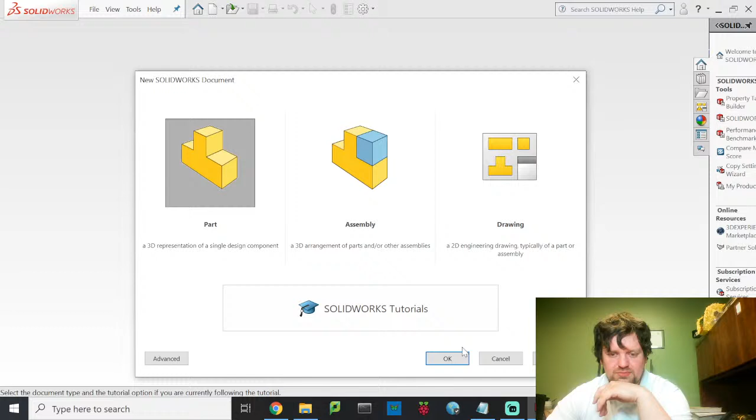I'm going to start by making a new part. Now, when I say reservoir, I do mean dust bin. I call it a reservoir because sometimes it's filled with water, sometimes it's just air. You can also have a foam reservoir, or a kind of goopy type reservoir that forces air through it—an interesting concept modeled after the human mucus system and how it collects and traps dust to prevent damage to your body, which is also kind of gross, but whatever.

Anatomy is gross, but that's coming from a biomedical engineer. I'm gonna just design mine to be very, very akin to a regular vacuum cleaner.

Now the types of dust bins I'm most used to are these shark dust bins, where the input comes in, the air cycles around, and as it cycles it throws the dust out of this portion and into the rest of the body. What you end up with is larger debris caught up here, but most of the actual debris you want to throw away is down here, and the outlet to the vacuum is right here. So in this reservoir you have to study where the input is, where the air comes in, and then it goes out through this central chamber. Because of the offset, it creates a kind of cyclone that propels all your items down into the base.

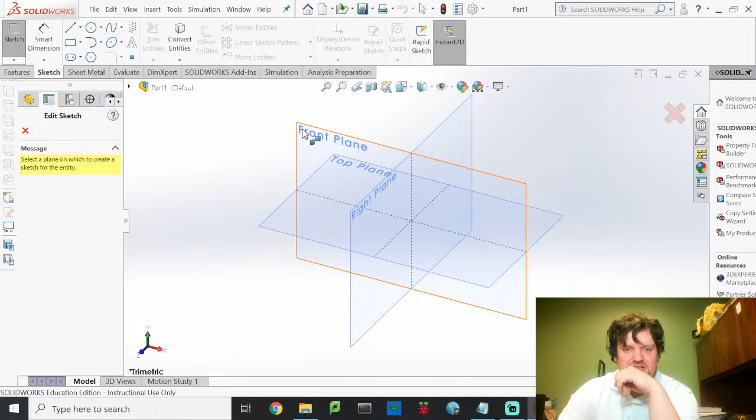Okay, that's nice. So I'm gonna go ahead and design my reservoir a lot like that. So here I'm gonna do a sketch. I'm gonna close this window real quick. I'm gonna do a sketch here on the top plane again because I am a normie.

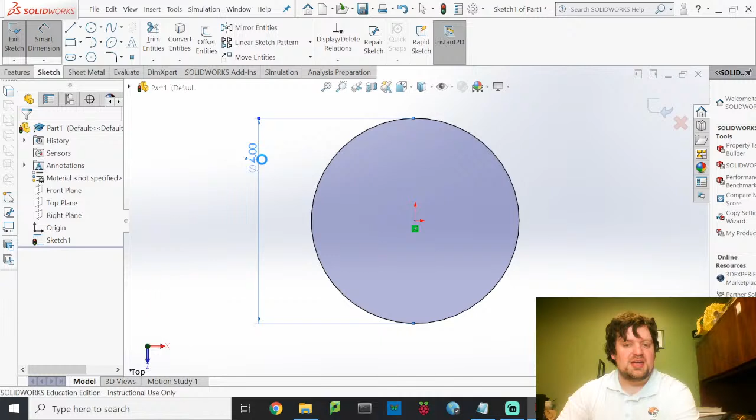Here I want a circle, because this is just going to be the foundation of my design. And then I put it on the origin, smart dimension it, dimension the outside of this circle. I want it to be about 4 inches in diameter. I don't want it to be too massively huge. The irony is that my fan itself is bigger than this unit. I'm gonna have some incredible suction powers. You know what, I better make this a hand vacuum. There we go, hand vacuum. Exit sketch.

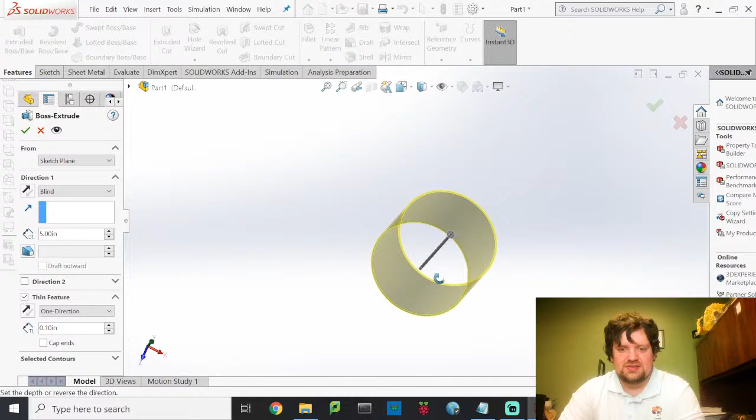Now when I go to extrude this, I can do an extruded boss base. There's two ways I can do this. First, if I just want this to be a mean diameter of 4, but I want that to be a thin shelled plastic piece, I can do a thin feature and then extrude this up maybe 5 inches. So now I have a thin feature, just a tube. That's what the thin feature does. And I can change the thickness of the walls by going down here and clicking on 0.1 inch. That's one way of doing it.

The other way is I can go in and do a shell, which cuts out everything but one surface, turning it more into a cup shape. Here I am actually going to make this a thin feature, because I want to put that cap on the bottom so the dust can be emptied from the bottom. And we'll go with that. So yes, I am totally about to rip off Dyson here, and no, I don't feel bad.

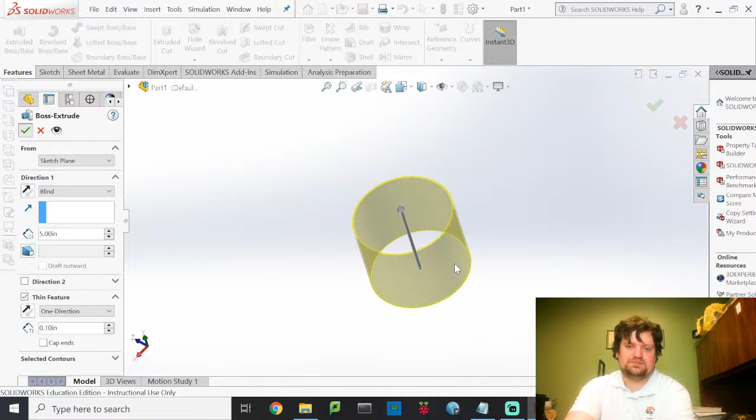So I'll go ahead and hit yes. And there I go, I have my reservoir. Now I'm going to have to make this an assembly piece, but I'll worry about that a little bit later. The next piece of this is I have to establish my inputs and outputs.

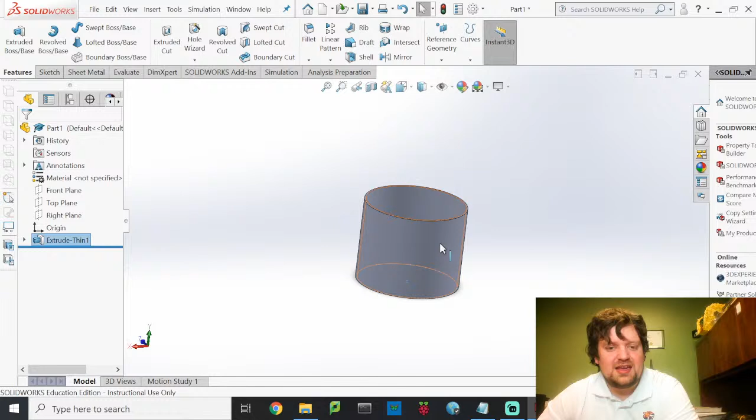Here I'd like my input to come in from the side, like what we were seeing with those other vacuums, and I want it to be offset a little bit. So I'm going to do a second sketch on the front plane. Front plane is right there. I'll go ahead and orient my view so that it's looking at the front plane.

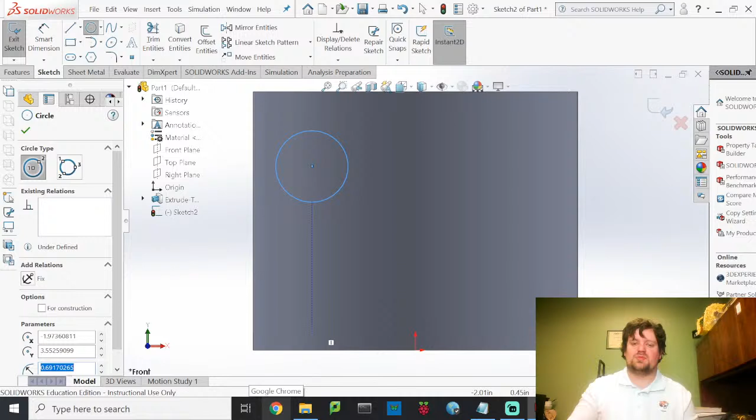And then I'm going to draw a circle like this. This is going to be my input tube circle. It'll come in and be tubular. Now, according to this design, I'm going to try to design it so that it's integral to the piece. I don't actually want this piece to be removed. So my inlet's going to be in one place and my outlet's going to be in another place. Hopefully I'm not going to be dealing with a very challenging component, but we'll see how that works out.

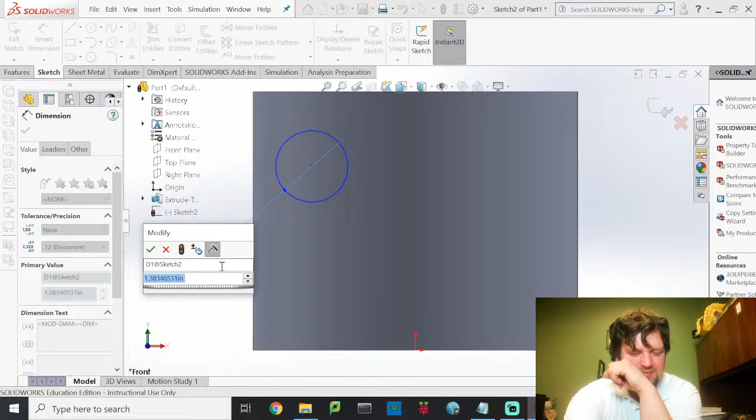I want this to be offset again because it's going to cause this thing to circulate inside of this tube. So the first thing I'm going to do is identify the circle. I'm going to use tube diameters of about 1 inch - it makes everything a little more compact. I guess I could use 2 inches, about this big. Inch and a half maybe. We'll do 1.5 inches - all of my tubes I'll try to make 1.5 inches.

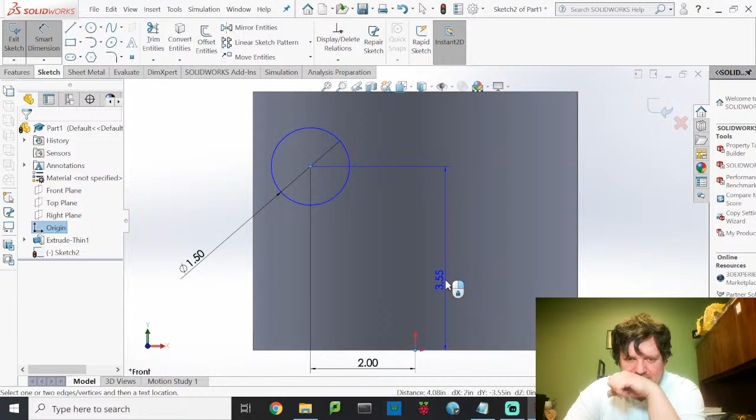Okay, so I've established that. Now I want it to be offset from this center point by 2 inches, and I want it to be offset vertically by 3.5 inches - just because that's really close to where I currently have it positioned. That's nice, so you'll notice it's fully defined. Go ahead and exit sketch.

Now I drew this on the front plane. If you go in and look at it, it's right there. I'm going to be cutting a hole in this side of the reservoir so that I can route a tube there.

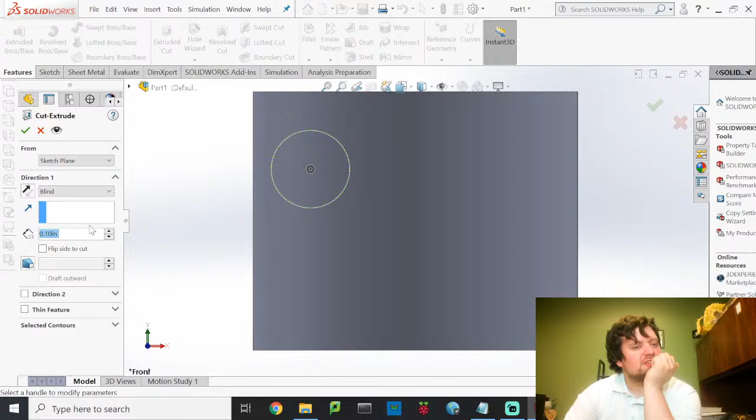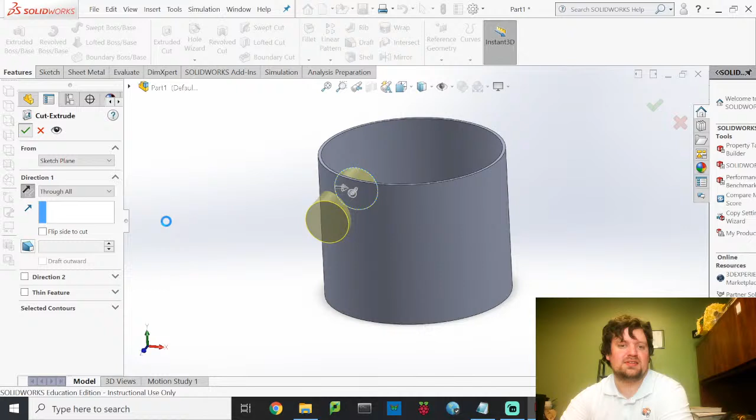So we'll go back into features and then do extruded cut. And with this extruded cut I'm going to make it go through all. Now if I hit through all both, it'll go through both sides - I don't want to do that. Here it's trying to cut through that side, I don't really want it to cut through that side. I want a flip side. Nope, nope. I want to have it cut this way. So I'll hit yes, and it'll cut a hole right there just like that.

Okay, well that's nice, it's a pretty looking hole. But I want a tube that goes to it. So I'm actually going to have to step back and do an interesting fix. Bear with me here.

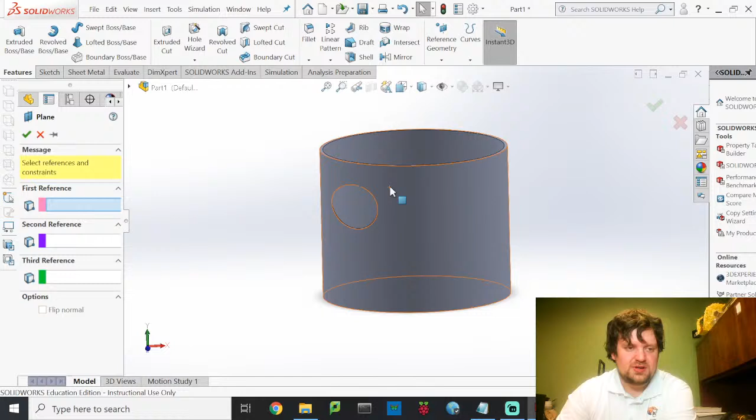I'm going to create a plane - we'll hope that my computer can catch up to what I'm trying to do. I'm going to make this be an offset from the front plane. I want it to be offset by - let's see, this is a 3 inch radius, so this will be 3 inches from the front plane to here. I want it to go out another 1.5 inches, so 4.5 inches from there. And that's where I'm going to draw my tube.

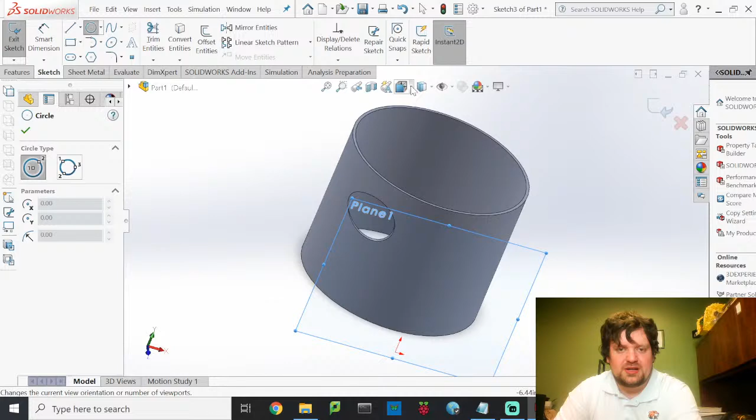Okay, so follow with me, follow with me. I'm going to sketch, and I want to sketch on this plane 1. Since I had plane 1 selected, it automatically decided that I wanted to draw on it. Nice work. I'm going to orient my view so I'm looking at where I'm at, and then what I will do is draw a circle.

Here I want this to be again - I said I wanted my tubing to all be 1.5 inch diameter. I actually want that to be 1.5 inch outer diameter, so I'll hit 1.5 inch. And then I will establish this vertical distance as 3.5 inches, as I've already done.

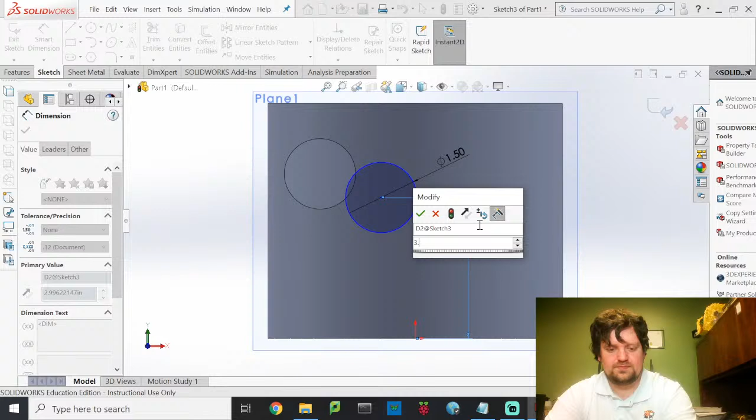I probably could have just copied this drawing instead of recreating it twice, but whatever, I don't care that much.

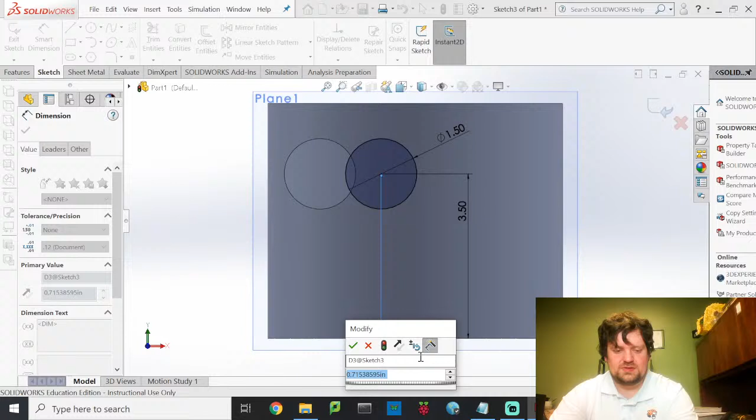Let's see, I think I had this at like 1.5. No, is that 2? Yep, there it goes. Okay, I'm going to hit OK, and then exit sketch.

Now that was fully defined, and I have this piece here, this circle right here. What I can do is go in and do an extruded boss base, selecting my circle.

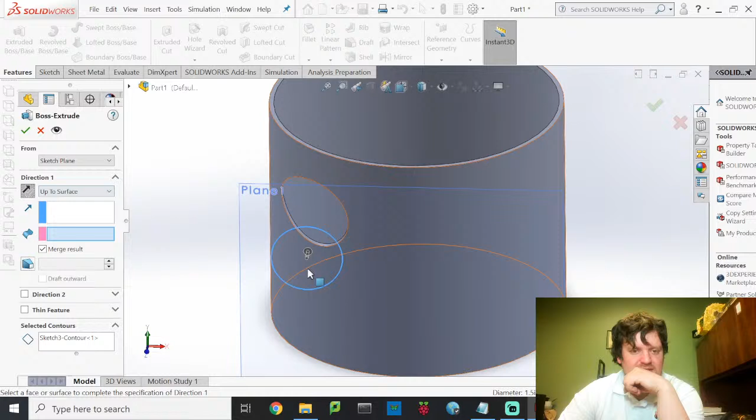I want to extrude it to this reservoir, so instead of doing a blind, it's going to go up to surface. I'll switch the directions, then pick the surface I want it to go up to, which is this one. You'll notice it just goes all the way through, so I'm going to make this a thin feature, and that will fix it because they are the same size.

Now all I have to do is hit OK. It did say to merge features, so this is now considered all part of one part. So there we go, we have an inlet valve.

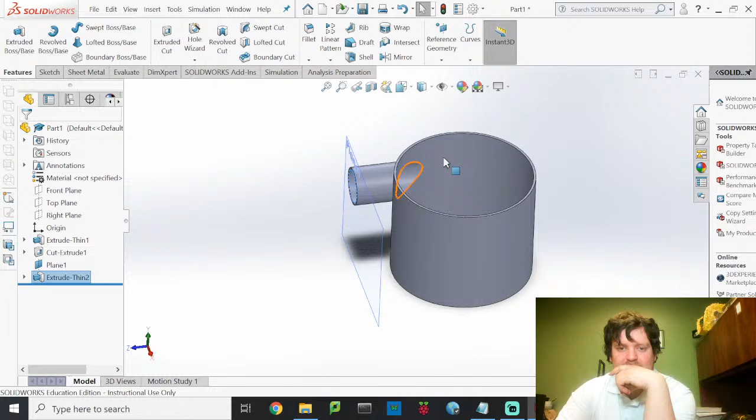I'm going to have air come in here, it's going to kind of spiral around, and then I'm going to have an output port where basically the air is going to spin around, and then go through a tube in the center. So I'm going to create my tube in the center as well as the top piece here, because those are kind of integral.

I'm going to make those two part of this piece. So here we're going to sketch, and I'm going to do it on the top plane, which is where I have that. Go back and click on the top plane again, so I can draw right here on this base. I'm going to orient my axes.

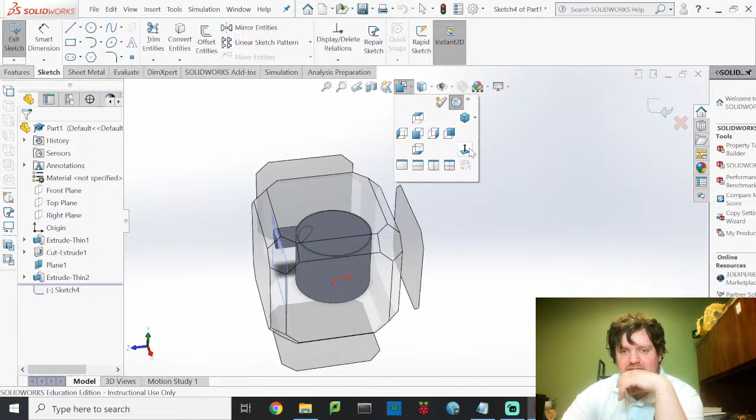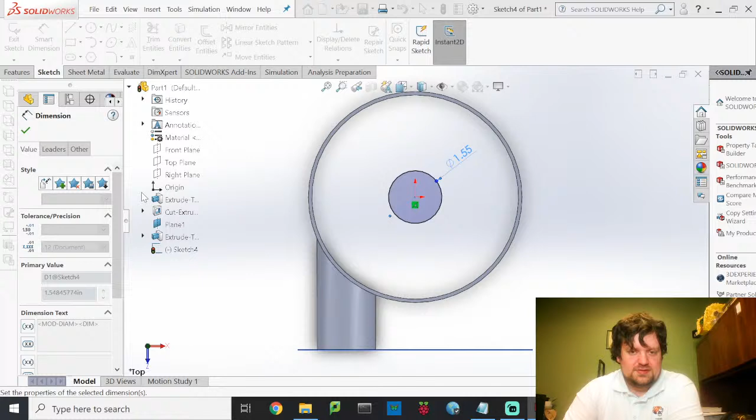Now I'm going to create a tube from this center point that just goes up. So I'll do a smart dimension. I'm having all of my tubing be 1.5 inches, just because I like consistency. And then I'll hit exit sketch.

So there's my circle, I'm going to extrude it up to the top here. Dang it, nope, I'm actually going to go back and delete that. I don't want it to be drawn right there.

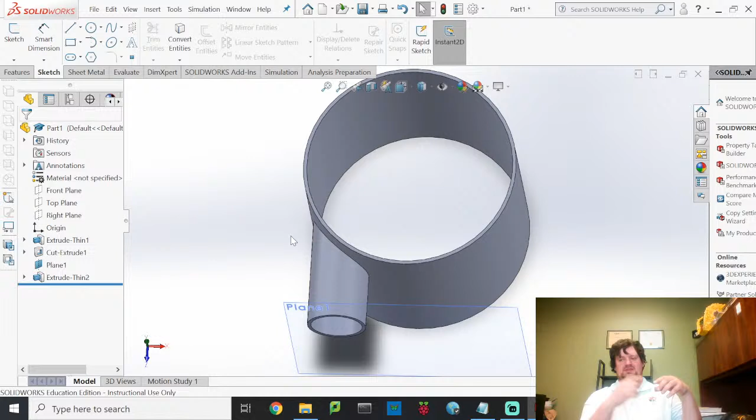I'm going to draw a top piece, and then extrude downward from that, just so I don't have to try to make some very funny geometry. Typically what they have for the tubes that drop down is they're perforated, they've got holes in them. I don't want to do that because I am not trying to design a vacuum well, I'm just trying to design a vacuum. So we'll try this again.

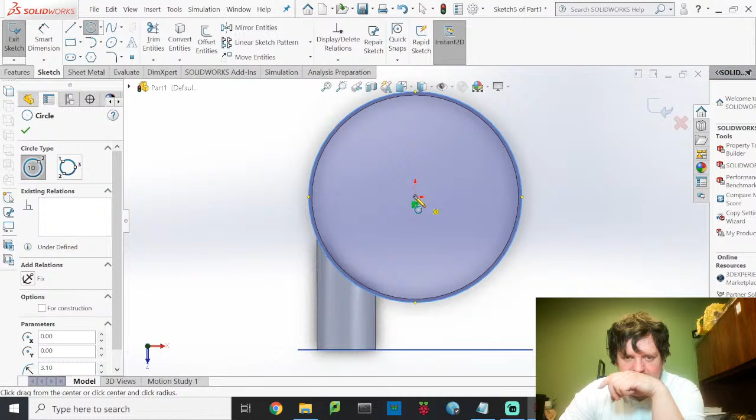I'm going to sketch, and I want to be drawing on this top surface right here, so I will quickly reorient my view. Then what I'm going to do is draw 2 circles, one from here to the outside there, and one from here just to there.

Now I'm going to dimension this one. This one I want to be 1.5 inches, as I've said, so the hole for it is going to be 1.5 inches. Now that's fully defined. Now this one out here is not, and that's because if I click on it and drag it, it's not really defined.

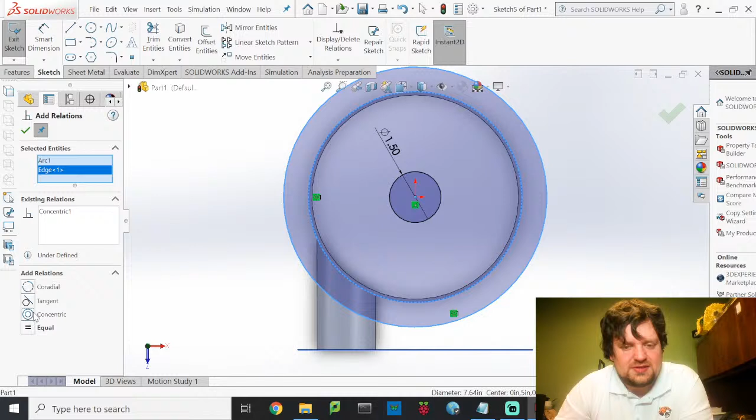So I need to add a relation. I've got this arc selected, I'm going to select this one, and I'm going to make them be— I think concentric, no that doesn't do it, never mind. I want them to be what co-radial is. Yeah, co-radial, or tangent, both of those actually work. Although in this instance, co-radial is just better because it means they have the same radius. Now, when I click off of this, those are both fully defined.

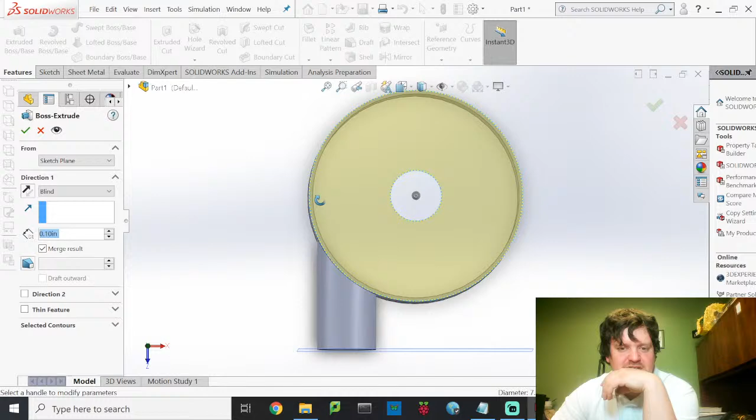I'll hit exit sketch. Then, because I want this to be a thin plastic feature, I'm just going to extrude it up 0.1 inches. I could've cut it on shell, probably would have been easier, but look, it's already at 0.1 inches. I'll make sure it's going in the right direction—it is. I want it to merge result because I want this all to be one part, which it is. And there we go, now my reservoir has an empty bottom and a hole in the top.

Okay, now I'm going to create a tube because I want the outlet to be down here closer to the base of this item, and it's just going to come out like that.

Again, not really designing this well. No, you know what? I'm just going to leave that as is.

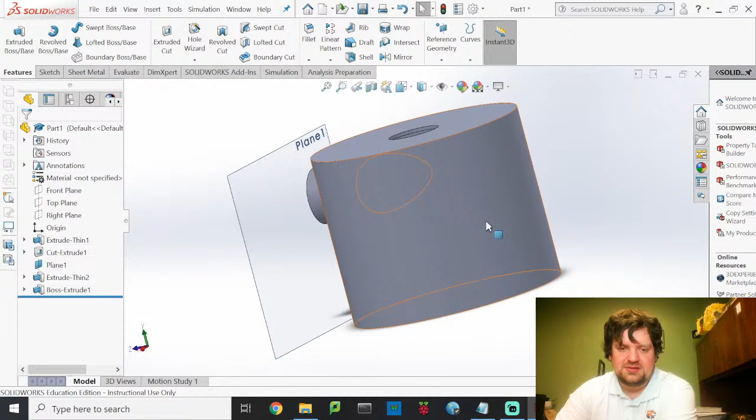I'm going to finish this piece by adding a hinge right here, basically just a hinge pin so that this can lock. And I am going to put a locking clasp right here, piece, so that it can clip on. Actually, no, that's way too designed. I'm just going to put a hinge, and then I'm going to create a plate for the bottom.

And then I'll build this into a reservoir assembly so that we can move it as one piece from there. But I do have to add those 2 circles in the back.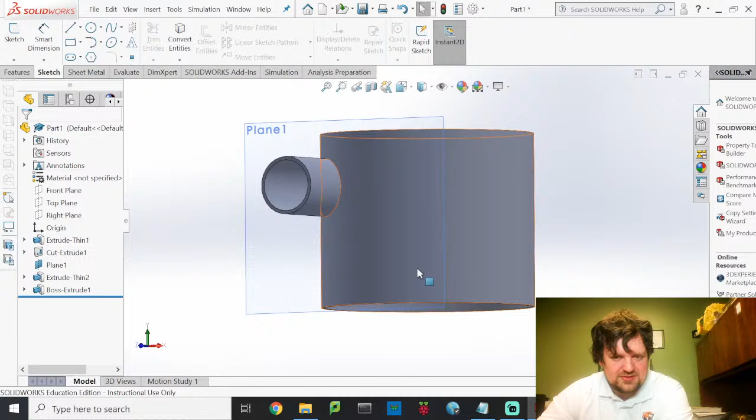So what I'm going to actually do here is I'm going to draw a sketch, and I want to do it on the right plane. This is one of the reasons why I wanted to have my origin right in the center, was so that I can draw on all of these planes and have some control over where these planes are. It's always good drawing practice to keep your origin in some kind of a convenient location. So here I'm drawing on this plane.

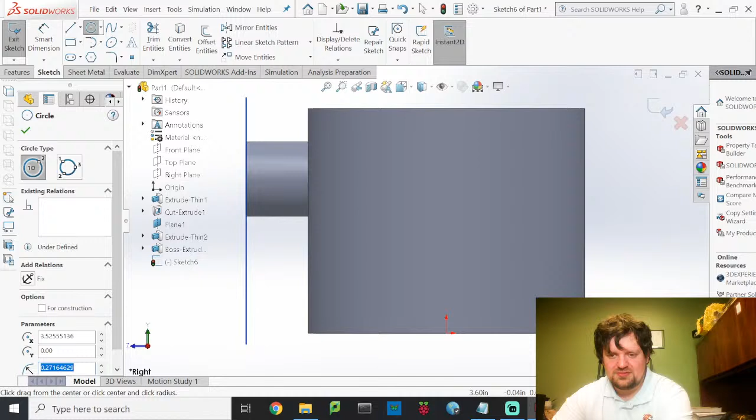I want my hinge to be about right here. Basically all I'm going to do to make a hinge is it's just going to be a circular piece like this that will have a hole in it, so that I can run a pin through there to connect a piece on the bottom.

So create 2 circles, hit escape. Now what I'm going to do here is I'm going to select this point, and then I'm going to select this origin here. I can hit control and hit both of them. Under existing relations, I want them to be horizontal. So it just means it'll hinge about this bottom piece here.

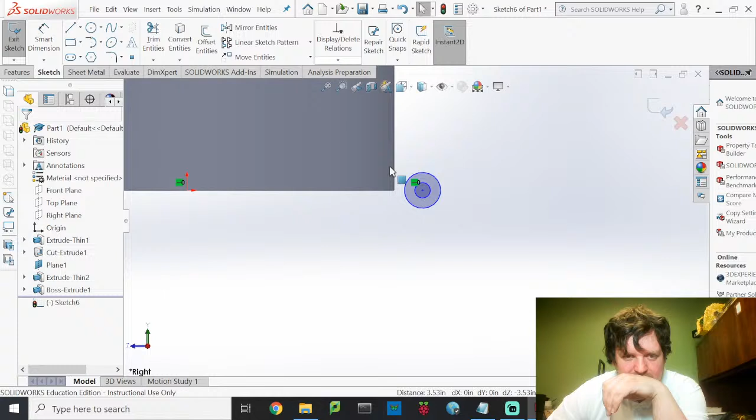Now I'm going to add another relation. Actually, I want this piece here to be tangent to this outer piece, so it's like a little circle piece goes on the outside. So I will add relation, pick this arc, pick this edge, make them tangent.

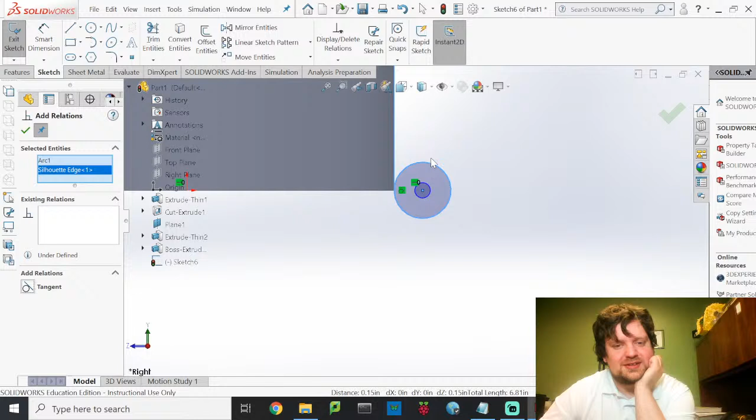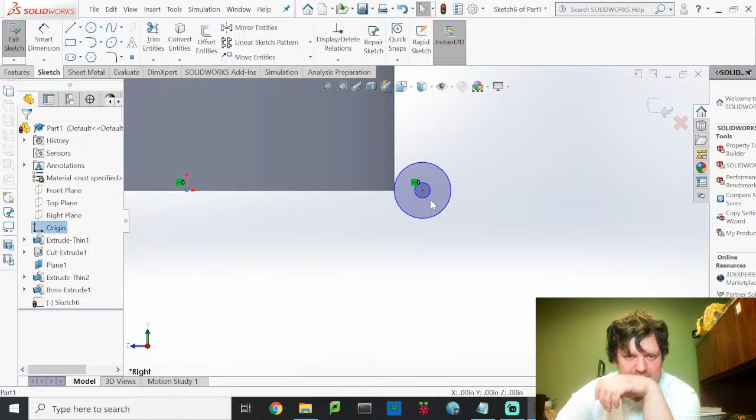Now, realistically speaking, this is only going to connect at one place, and it's not really going to be a very good connection. Tangent probably is not the best way to connect that. I am going to go ahead and just delete this. I'll set a smart dimension from here to the center point.

Smart dimension. Right now it looks like it's at 3.5 inches. I only want this to be about 3.25 inches.

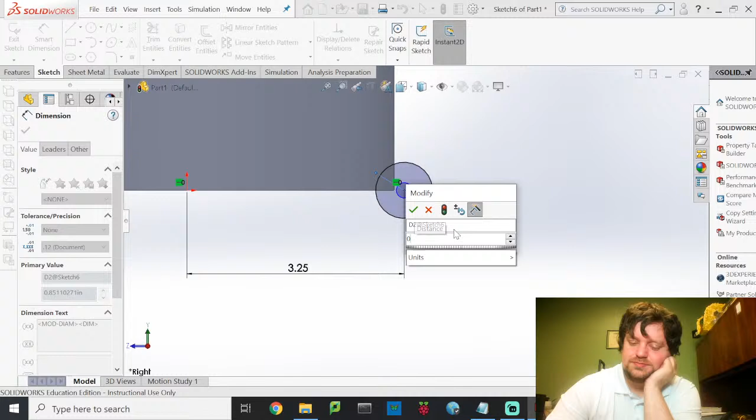And then I want this diameter of this circle to be, I don't know, quarter of an inch. That might be too small. Yeah, I'm going to change that. I'm going to pop this up to 1/2 inch.

It will intersect the base here, which again is fine. And then for this one, I want this to be 1/4 inch, because that's going to be my pin diameter that I use to connect this piece on. So I'm going to hit OK.

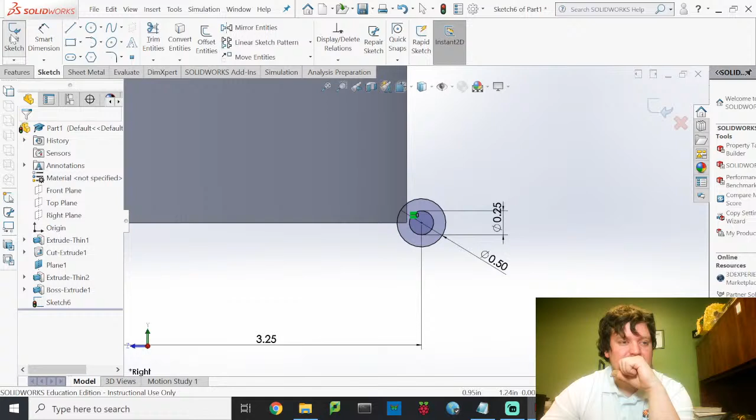It's fully defined. I exit sketch. And then I'm going to go back in and boss base extrude, because I just want this piece. You'll notice it already kind of intersects.

It does intersect with this piece there, which is fine. And then I want to go mid-plane extrusion. Basically, I want it to extrude out both sides. And I want this to be about 1/2 inch long.

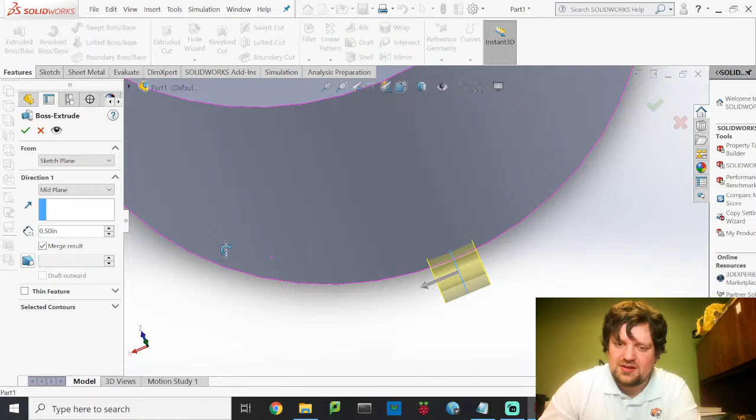Okay, so it will intersect with this. It doesn't appear that it stops intersecting with it, which is kind of what I want. It's got to have some place to connect to. So 1/2 inch. There we go. Oh, that looks pretty. I like that.

Alright, so I've got my hinge joint, I got my input, I got my outlet. I am going to have to put a filter up here, which I will do right after I finish building the rest of my base.

I am going extra on designing my base. You probably don't need to do anything like this, but oh well, it's time for me to show you good practice. So I'm going to go ahead and save this piece.

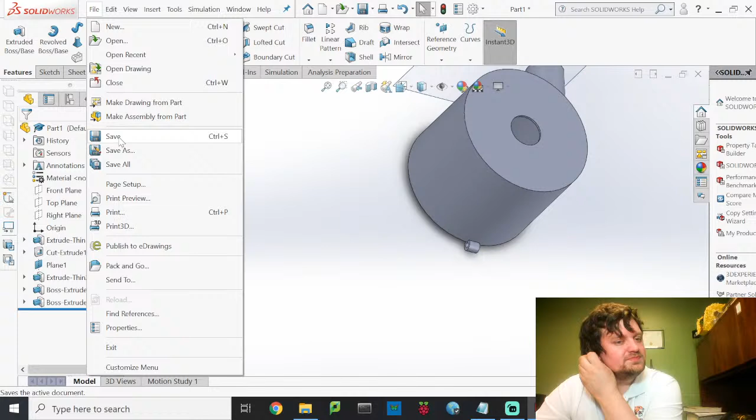Now, as I've told you, you should save all of your pieces in one place. Here, this is my vacuum cleaner. Start date of when I started drawing it, which was 4/1. I'm going to call this Reservoir Body. And hit enter. It'll save it.

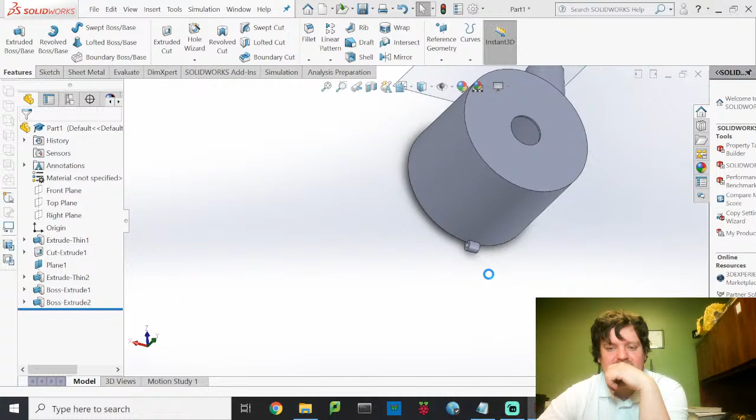And then I'm going to create 2 more drawings. One of them is going to be a really simple pin, which is just going to be, it's a plastic pin which will go into hold the reservoir flap on. I'm not going to design the clasp for that thing. This thing is just going to be a flat piece, because I can.

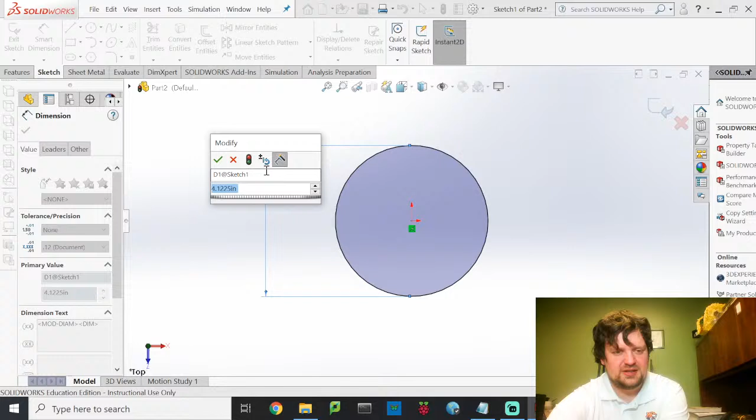So here, top plane, draw a circle, start dimension. This is going to be 6 inches in diameter. Then I exit sketch and extrude this 0.1 inch.

And hit yes. So here now I have my flap. Now I am going to create a method of joining, because I have to be able to fit in, slide on and then surround that, and then a pin has to go through all of that. So I've got a 1/2 inch gap right in the center, where that pin comes down so it'll connect into that joint.

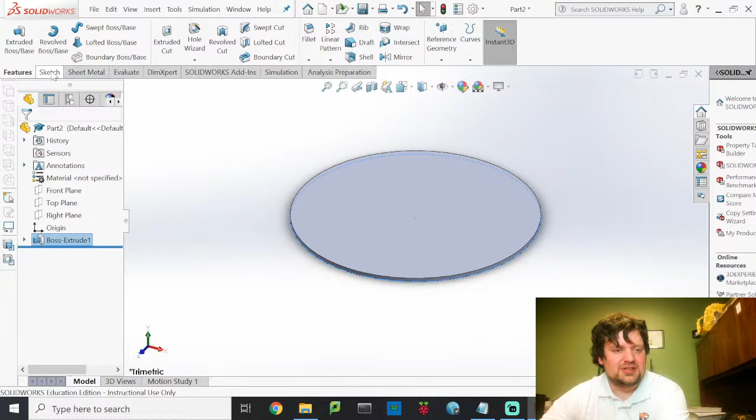So you know what, I'm going to do something fun. I'm going to do a revolved boss base here. I'm going to sketch on this top surface, zoom in normal to it, and then draw a rectangle. I'll draw it a little bit over here and then move it back closer.

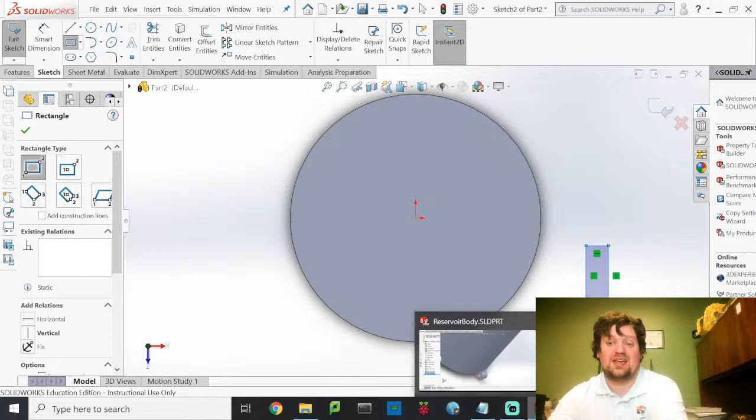What I made was this round piece. It's 1/2 inch diameter, 1/4 inch pin diameter, so that means I've got 1/4 inch of material between the two sides, making my wall thickness 1/8 of an inch. And for my dimensions, I'm just going to make it 1/2 inch on both sides too. So the dimension of this square needs to be 0.5.

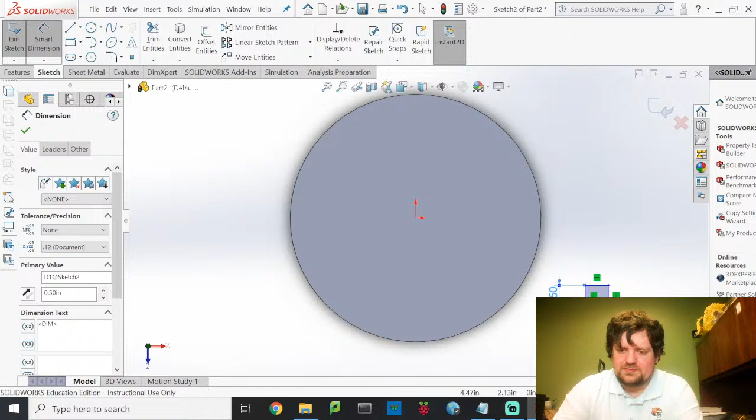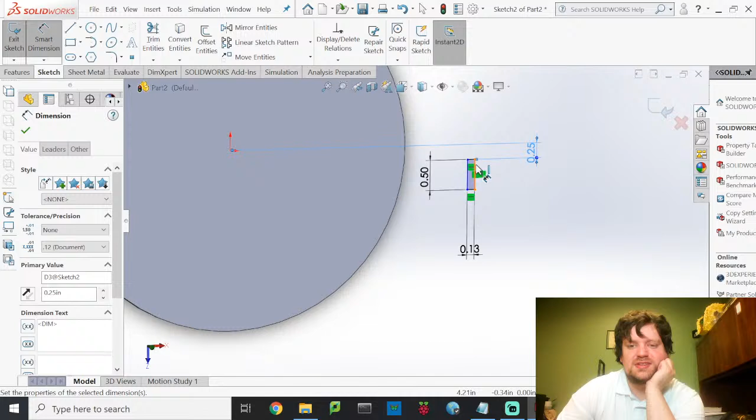By 0.125. Now this piece here, from the origin to this top piece is 1/4 of an inch. You'll notice the dimensions here all get kind of gross, but that's fine, in a sketch it doesn't matter. And the distance from this inner line right here to the origin - we had it be, what, 3.25 inches? No, it was 3.25 to the center, so this is 3.125.

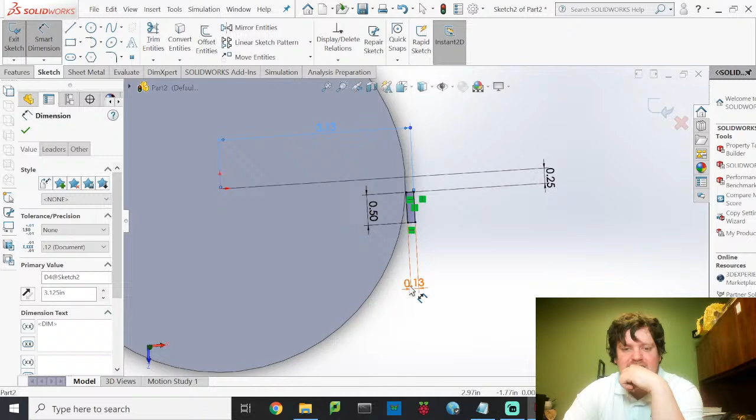Now, as you'll notice, this piece is not actually connected to our drawing, so I'm going to make this dimension, instead of 0.125, a little bit bigger - I'll make it 0.2, just so that it connects all the way. Now you'll notice it's fully defined. I'll hit exit sketch.

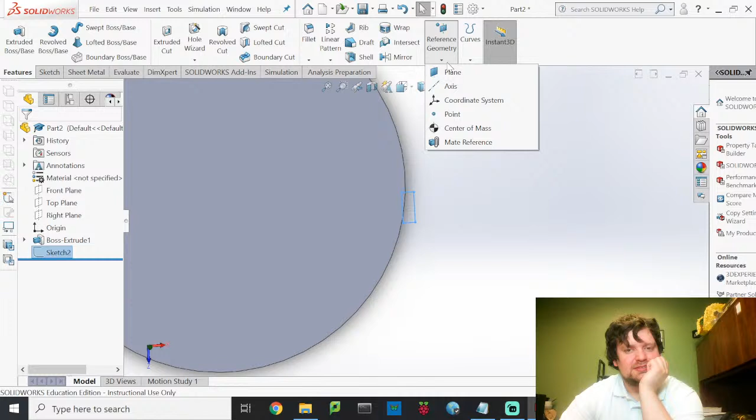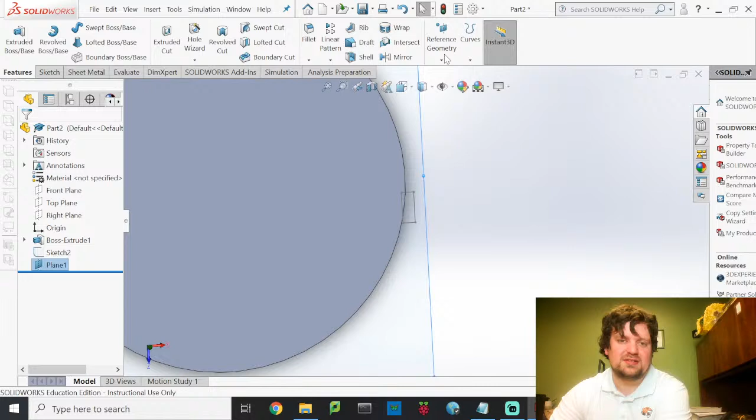I am going to very quickly create an axis that I want to revolve this around. To do that, I'm going to have to create 2 planes first. Alright, we'll play that game. So here, I want it to be coincident, it's now fully defined - there's plane 1. I'm going to create another plane here, and it's going to be - not the front plane, it's the right plane.

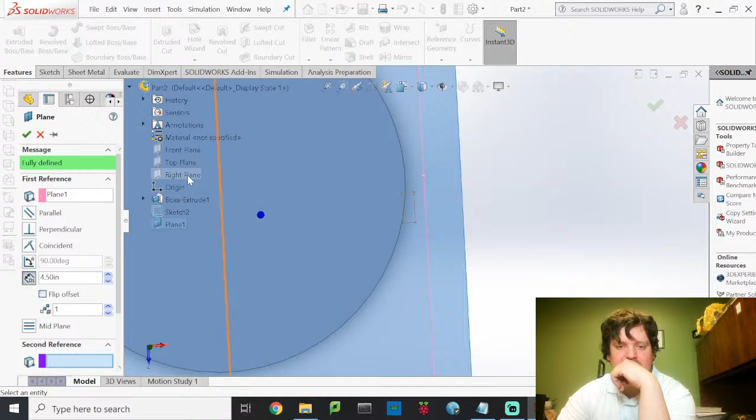Can I draw on the right plane? I totally drew on the right plane. Oh well, this component's going to have to be rotated - whatever, that's something we can deal with in the assembly. But I'm going to make this coincident to - oh no, coincident to the right plane. Oh no, I didn't want that to be coincident, I wanted it to be parallel. I'll just go in here and click plane 2 and edit feature.

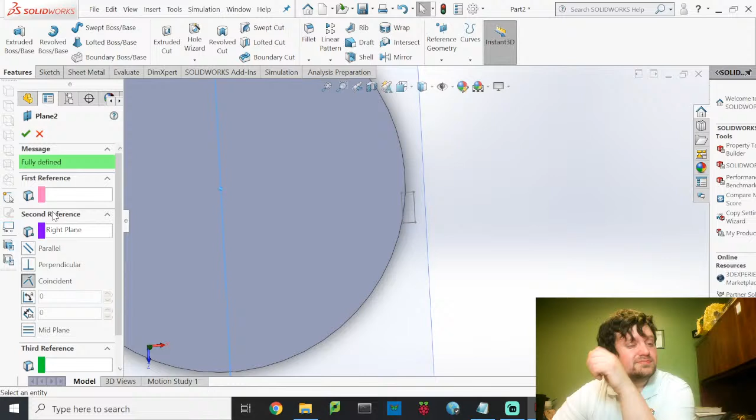We'll set it as a distance, and have this be 3.25 because that's the distance to where I want my axis to be. Okay, this will allow me to establish an axis. So here I can create an axis at the intersection of those 2 planes. So I click 2 planes, then plane 1, then plane 2 - or face 1, I guess, works just as well when I don't need a plane 1. And there we go.

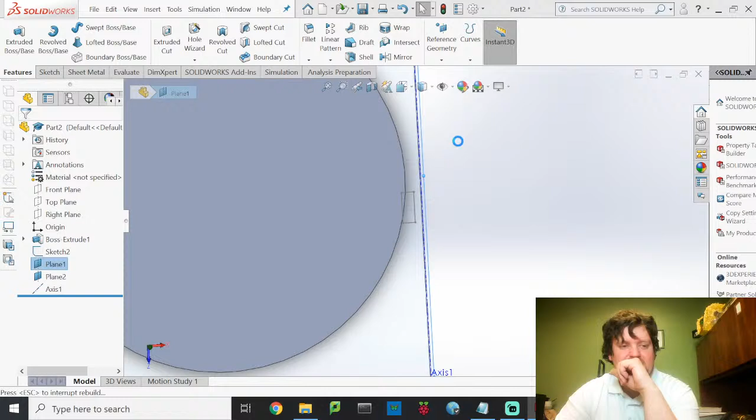I'm actually going to delete plane 1 now that I don't need it anymore - there's no dependency. I'll click on this, and I'm going to hide it because I will never need it again, I only needed it to establish an axis. Now I have my sketch. I'm going to do a revolved boss base. It's going to ask me what selection I want.

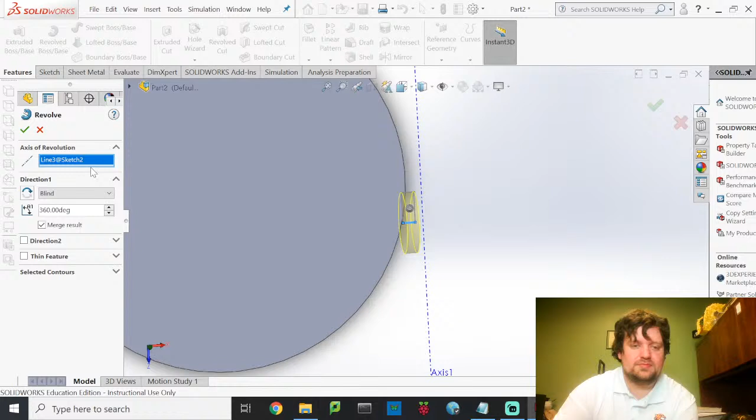I go in here and click on our little rectangle. For my axis of revolution, I don't want it to be itself, although you can do that - instead I want it to be this axis, so it'll rotate about like that. And I'll hit OK. Alright, I have one side of this piece.

I need to create the other side, so I'm going to do a quick mirror now that I have Revolve 1. It's asking me which plane to mirror across - I'm going to mirror across what is my front plane so that it's on equal sides of both pieces, and then merge result. So this is my bottom cap that I'm going to put on my reservoir. I'll go ahead and save it as reservoir cap, or reservoir flap.

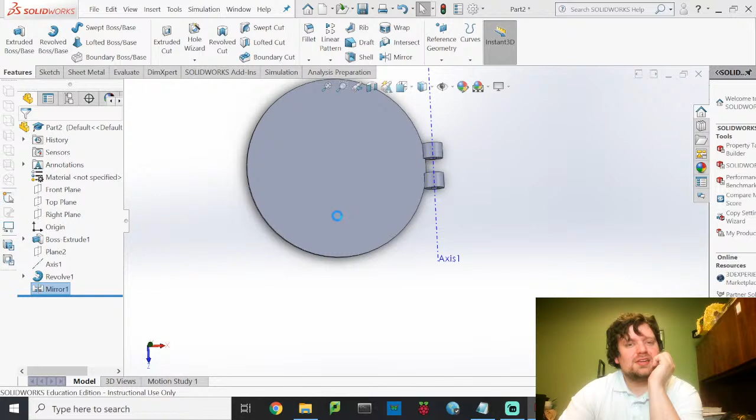Always important to note what subassembly it is when you name it. Otherwise you have to put it in a specific folder just for reservoir components, because it's really easy to forget what each piece goes to as you continue to build along.

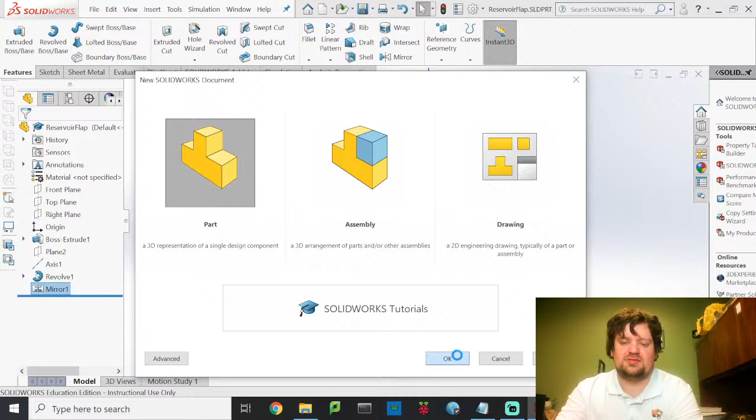So the last piece I'm going to make is the reservoir pin. Again, I'm going to name all of the components that go into the reservoir assembly with reservoir in the name somehow. You can get really detailed in your naming schemes for these pieces. Some people will even go so far as to provide material decisions and overall part dimensions, just a lot of different things go into it.

So now this pin that we're creating is 1/4 of an inch diameter and 1.5 inches long. That should be pretty easy to make. I'm going to draw this in the right plane because I screwed up last time, and this one's actually going to be really simple.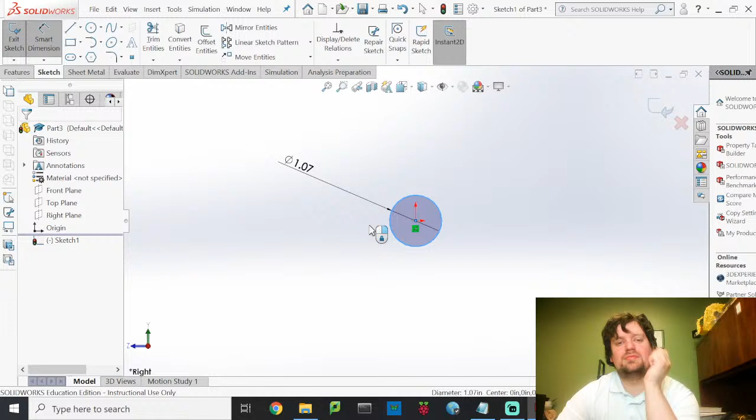Draw this, smart dimension, make this be 1/4 of an inch diameter. And then exit sketch.

I am going to do a mid-plane extrusion, that's just personal preference there. And it's going to be 1.5 inches long. There we go.

And then I'll save this as the reservoir flap pin. And hit enter.

Now, to finish my design for my reservoir, I need one really nice piece, and that is I need to put it all together. So I'm going to go into an assembly. New assembly.

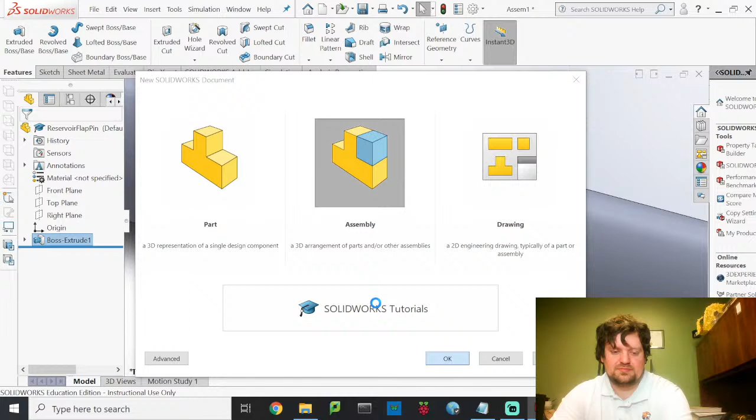I'll wait for SolidWorks to stop being dead. Hopefully that happens at some point. Well, you never know. I just realized I haven't drank a Mountain Dew today. Mountain Dew, breakfast of champions.

Okay, so now making an assembly is different from making just parts. Here, it's going to ask me where's my base part. The first part you put in is going to be assumed to be the base. So here it's going to be the base, the component that everything else basically gets mounted to.

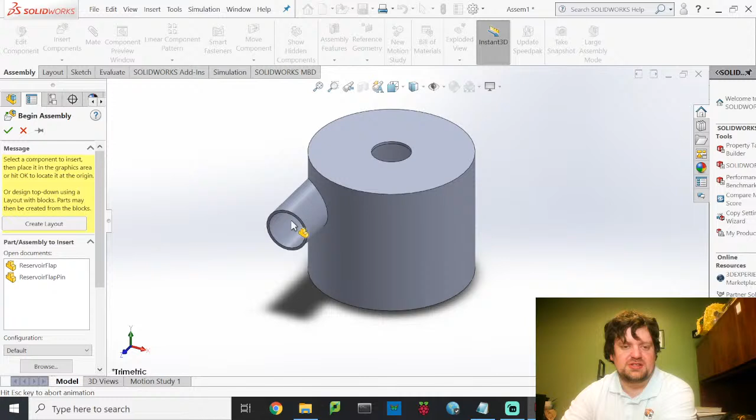So here, the reservoir body is what I decided was going to be my regular body piece. Go ahead and put it down. It'll center it. You'll notice over here it has an F. What that basically means is I can't grab it and move it. I get the error message that the component is fixed, it cannot be moved. So that's kind of what I want.

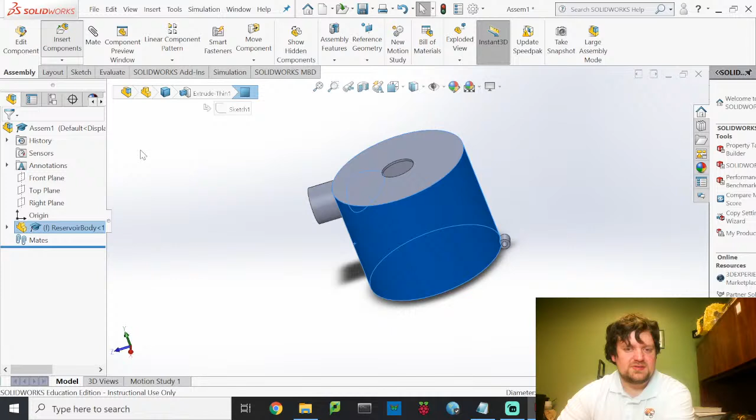Now I'm going to go ahead and insert components. Because I already have these components opened, it's going to pop them up here. Otherwise, I would need to go down into my Browse tab. I'm going to first put in the reservoir flap. As I told you, this is 90-degree rotated.

Bruh. So my nephew likes to put it.

So we're going to put these components together with some mates. First thing I'm going to do is mate the top piece of this to the bottom of the reservoir, just to make it stay put. So I'll click on this face, zoom in on this edge, which is a face. So you'll notice I have two faces. I want them to be coincident, which basically just means they touch each other in appropriate ways.

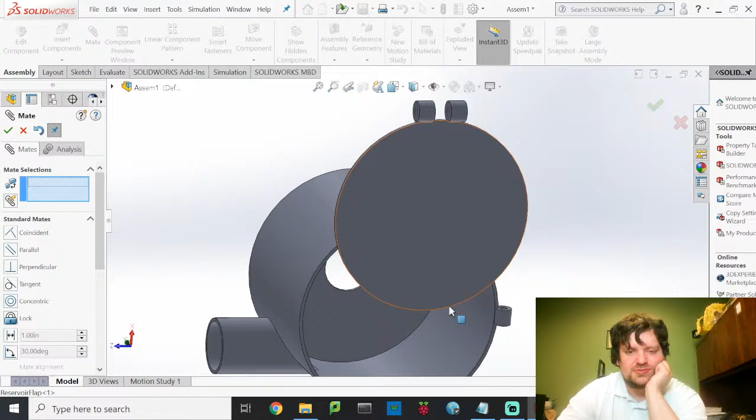Now, the next thing I want to do is align the axis of this to the axis of this pin here. In order to do that, I need to be able to see those axes. So I'm going to go into View, Hide Show, Temporary Axes. And what that's going to do is pop open these little axes. So here I can click on that axis and zoom in, click on this axis, and it will align them.

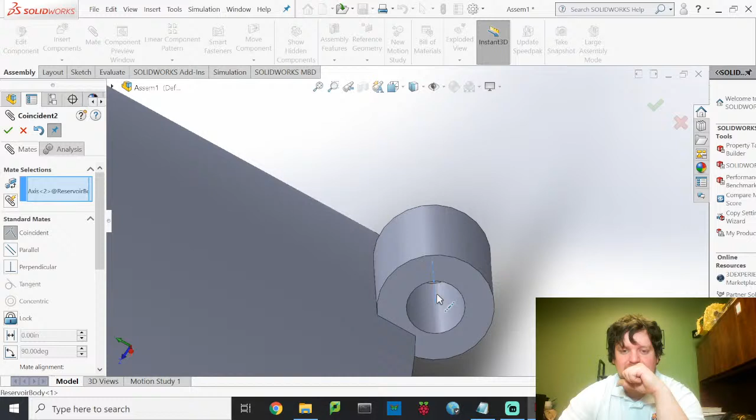Now lastly, there was an axis that was formed here because I extruded a circle, and then I have this axis up here because I extruded a circle. I'm going to make those be coincident, and what that'll do is align all of these. So I will hit yes.

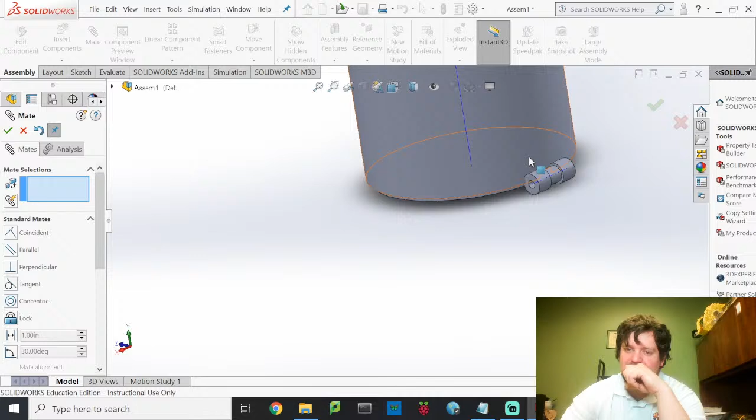That right there is what my hinge joint looks like. It's pretty. It does kind of cut into this piece here, but we're going to ignore that because I'm not spending that much time here. I'm going to go ahead and get out of the mate menu.

I got my flap on. The flap looks good. It's a little bit smaller than the rest of my tank, but it's only about 0.05 inches. Last thing I got to do is put in the pin.

So I drew this on the right plane. It's coming in as, it looks like a square. Nice. We'll do two mates.

First mate is, I'm going to make this face to the outside face of this thing, and then make those be coincident. So all of that does is it pushes that pin all the way in, and here I'm going to mate this axis to this axis here.

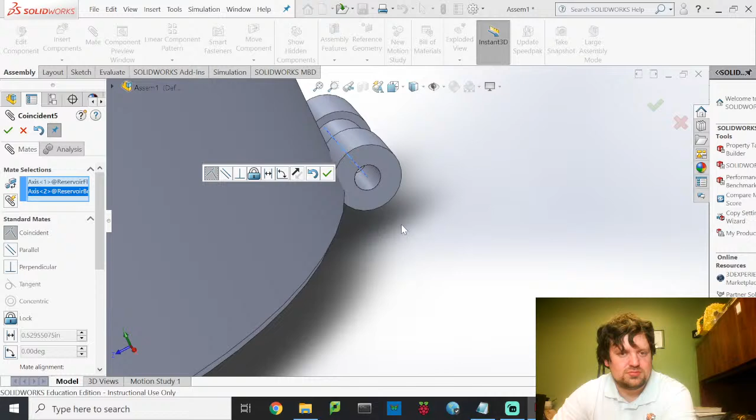We'll try that again. This axis here to this axis here.

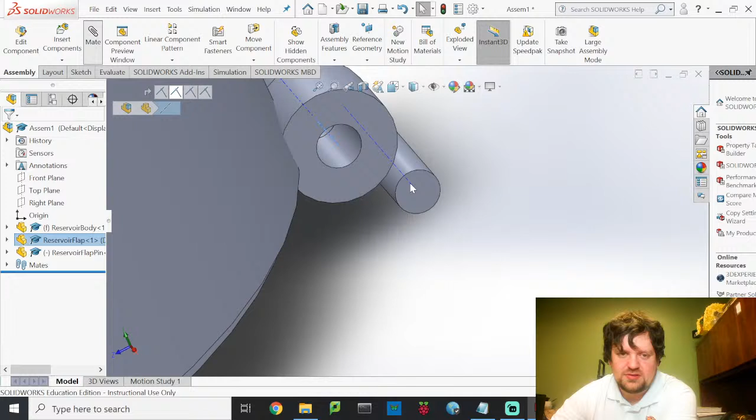Oh mate, I feel so Australian when I do this. Come on, mate, come on. Of course, I could also be an Australian biologist.

There we go, and it moves them. Set them to be coincident. Hit yes.

Okay, now you'll notice that I've got a pin that runs all the way through. If I go into my mates and delete that one mate I put on, I think it was the very first one where I mated the faces. Yeah, if I delete this mate, then I should actually be able to grab this.

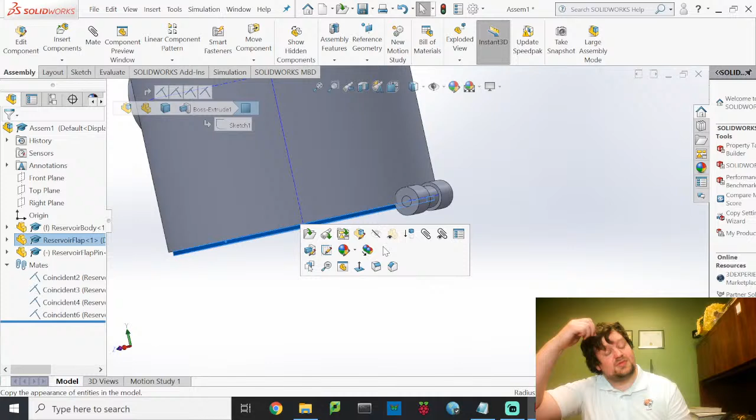Oh right, that's because this component here, making them concentric, basically prevents it from opening. Otherwise you could open that and show it. If I deleted that mate, which was the third mate here, I would be able to open this flap, but it would also cause my flap to fly in and out.

So it's fun things. All right, now I have my reservoir saved, I'm going to go ahead and save this assembly. Rebuild and save - it'll rebuild all of the components to make sure they're up to their latest definitions. Then I'm just going to put this as the reservoir assembly, in the same place as my other reservoir components so that I don't lose them.

The assembly piece doesn't actually save the physical parts. You can see them here, but it's relying on the definitions created in a different part file. If I were to close all of these and move the assembly file to a different location, when it opened up, it would be all screwed up.

So I'll show you that quickly, just to reiterate the fact that you don't want to move your components around. Oop, that's the wrong one - that's a project I did last year. I should delete that.

But still, the file sizes themselves are kept to a minimum because it really only identifies the mates, how many parts there are, the orientations of those parts, and then the mates. What you'll see here is it's trying to go and find those files. I do have those files on my computer, so it might be able to find them and rebuild this document, but it also might not, because it's trying to figure out where those files are, and it's going to struggle a little bit with doing this.

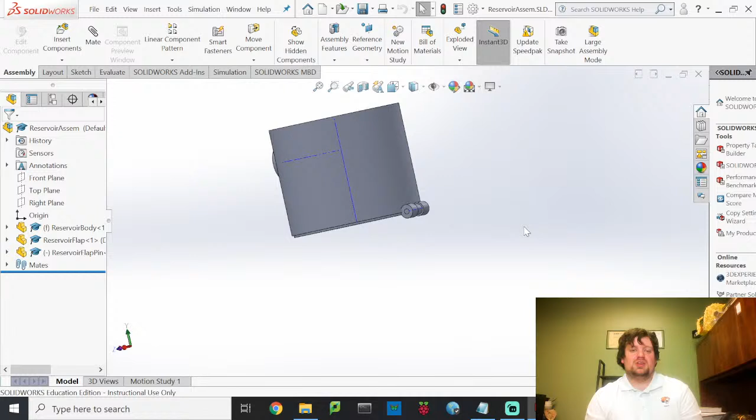So again, this just goes to show you, don't move the assembly file without moving the parts - it does actually create problems. I know it ended up finding the parts, which is kind of surprising. But anytime you move from one folder to another, you end up really struggling with - you may lose parts. So keep everything together in one folder. If you need to move something, make modifications, or create a new iteration, you end up copying the entire folder over. It's going to save you a lot of headaches that way.